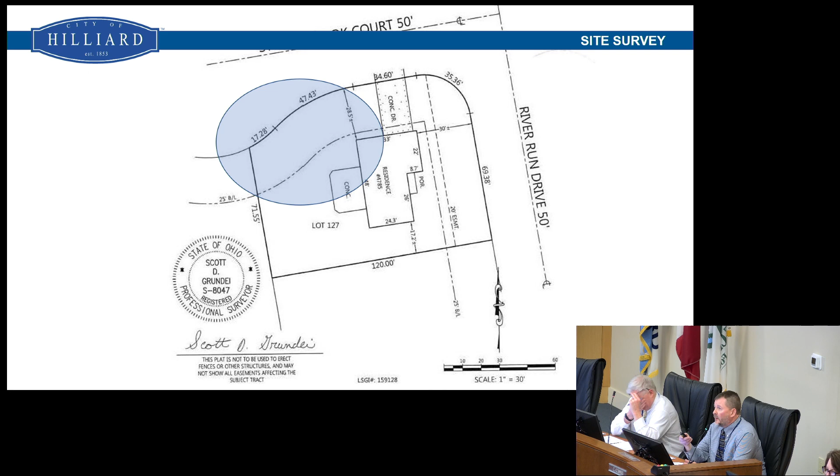The applicant, as noted in your packet, is looking at the portion in the blue bubble for the variances. There are some images submitted by the applicant, giving you a view toward the cul-de-sac in Stony Brook, so you can see the general area along the house and sidewalk where the fencing would be located.

This gives you a view of the neighboring property as well as the general area where the fence would make a turn and go down the side yard with the adjacent property. These are also images looking along the street and the corner of the house where the fence would extend out toward the sidewalk, and another view back toward the cul-de-sac bulb.

The applicant submitted 3 separate options. The first, option A, would basically place the fence 6 feet from the sidewalk. The right-of-way in this case is actually the center of the sidewalk, so the setback would be 8 feet. We've added a graphic to the bottom of the screen to generally show the approximate location of where that fencing would be placed based on the option.

Our major concern with the submitted options is ensuring the proposed fencing does not screen off or provide a visible barrier to the adjacent property. The second option, option B, has a variable setback but generally places the fencing outside of the landscaping, and we have a graphic showing approximately where that would be. The third option, option C, is another variation that would pull the fencing back behind some of the front landscaping, the small arborvitae, as shown in the picture.

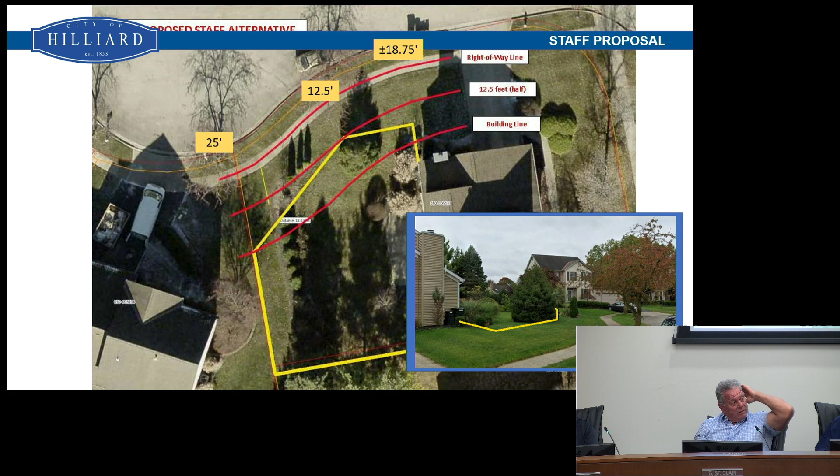In your opinion—go back to option C, if you could. That's the 15, so that's 12.9 to 15.3. Yeah, 15.3, 12.9. That one, I have no problem with.

I would think that from the cul-de-sac view, being able to see the evergreen and allowing it to grow on the outside of the fence would be a better solution, because you're really encumbering that evergreen on two sides. If you brought the fence in and allowed the evergreen to grow on the outside, one, it's going to conceal a heck of a lot of the fence, and two, as the evergreen grows, it's not going to create a problem with the fence.

Do you think it would look better from the cul-de-sac to have the evergreen on the outside, or would you rather see it on the inside? Help me understand your perspective. I think you'd run into the same problem with the fence on the inside—you'd just have the evergreen growing into the side of your fence that way. I think the amount of impact between the fence and the evergreen is limited if we bring it back.

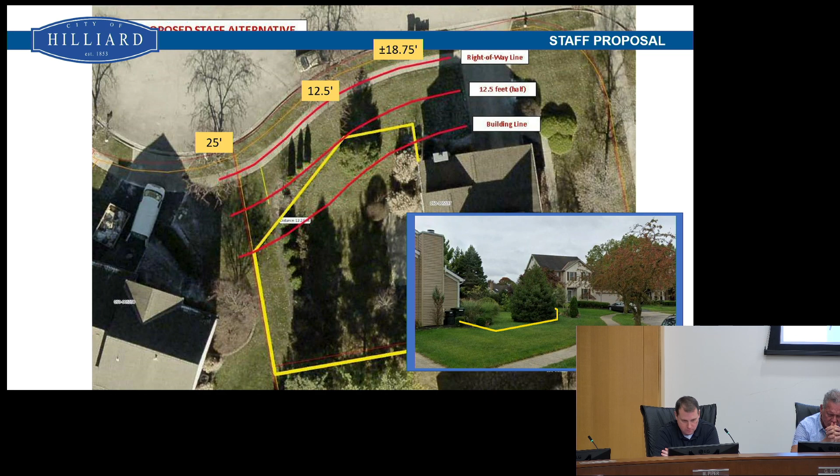Where we're kind of hitting it on two sides - if the fence is on the outside, we're really only hitting about a quarter of the circumference of the tree if it's brought in. In my opinion, I think his main concern is the amount of space you lose if you bring that fence inside that evergreen. You can see the red line going through the edge of the evergreen already, so we'd have to put it even further inside the building line, which would cut out a third of the front yard.

Are you putting a gate up there at the top of the driveway? Is that where the gate's going to go? When I talked with the fence company, the intent was to put one on that vertical yellow line, and then also another one in the backyard.

Somebody asked if we'd be comfortable having the fence at this point. It wasn't about comfort, it was visibility concerns. So this point is actually inside this neighbor's wall extended, so having it here, you're outside of that. That's one of the things you look at for corner lots generally, and why that original code section was included. But I don't remember any other lot with this similar situation - we've had ones that curve or angle a little bit, but not with a cul-de-sac bulb that close to the front property line. That's the one thing we were looking at, the view out of that window on that side.

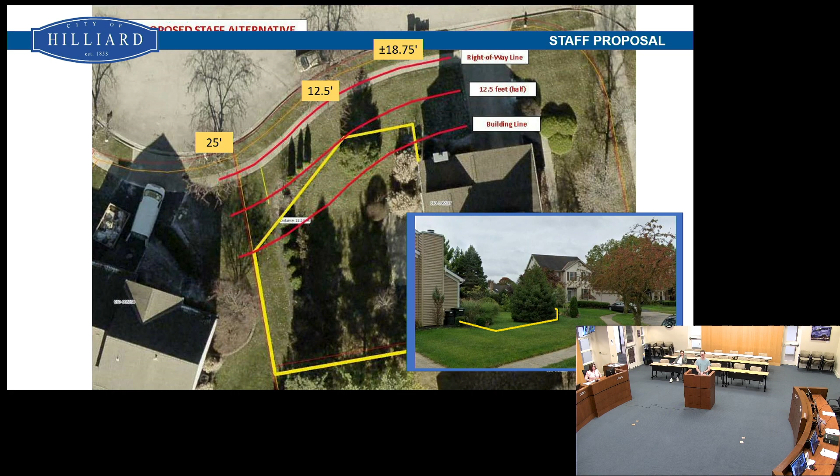But then we determined that the right-of-way was actually the center of the sidewalk, so that's not relevant to the discussion at that point. This is why we decided to do landscaping 5 years ago. Yeah, this seemed like a very unique, complicated situation.

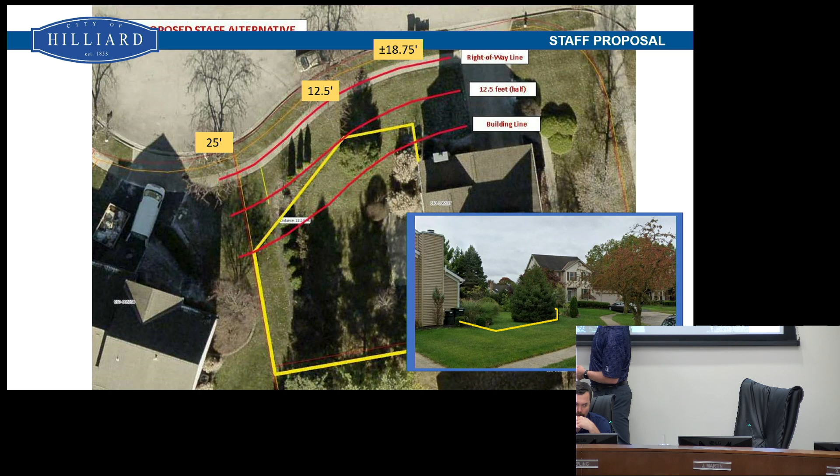Oh, is the landscaping inside the fence or outside the fence? No, I'm talking about this landscaping right there. It's outside. But if we take this line up to here, it's not. Yeah, it is. The river birch and those arborvitaes will be outside of it.

Okay. Thank you very much.

That would be helpful to include in a motion, the location with respect to those known points, because the aerial photo and a survey aren't always exact, so those lines are estimates based on that aerial. So it would be helpful to describe the placement in a motion, or in conditions, either way.

Okay, I'll make a motion. And if anybody wants to modify this, please say so before it is seconded. I move to approve, wait, I'm on the wrong one.

I move to approve a variance from Hilliard Code Section 1121.02D1I to reduce the setback along a secondary front line from 12.5 to 5 feet, to increase the permitted fence height from 48 inches to 60 inches, and to permit a wooden board-on-board fence in lieu of an aluminum wrought iron design. And actually, that 5 feet, from 12.5 to 5 feet, was a mistake.

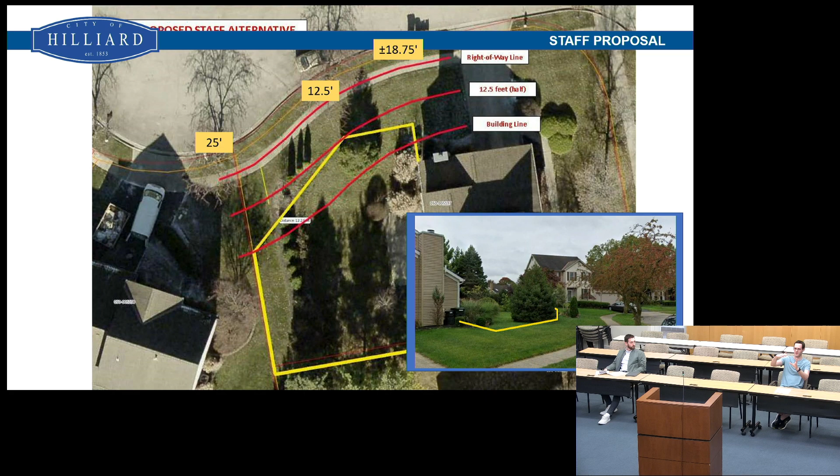I think it's clear from the image of the staff proposal that those are outside of the line. Agreed. So I don't know that we need to stipulate that, and it could be a problem if we said those have to be outside, and what if they die? Then does he have to plant more, or, you know?

Okay. Any other critiques? No. Okay. Is there a second? I second that motion.

President Epling, yes. Vice President Donato, yes. Mr. Piper, yes. Mr. Martin, no. Mr. St. Clair, no. Mr. Steele, yes. Mr. Steep, yes. Motion carries, 5-2.

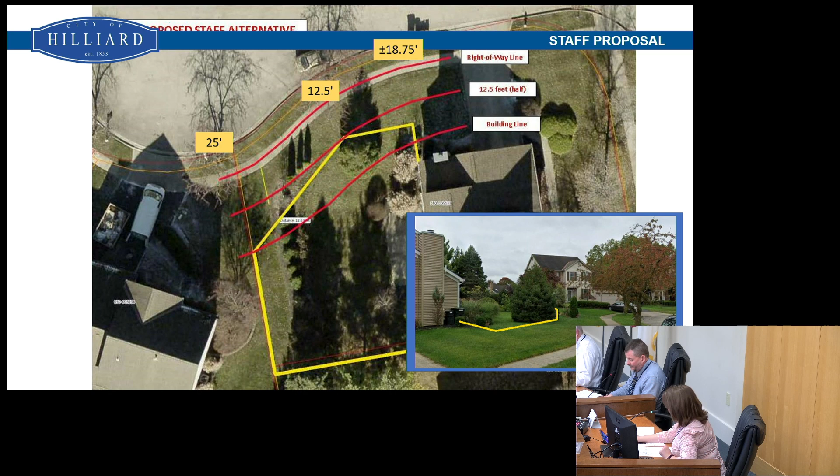All right, so do you understand which one we just passed here, and what your options are with that? Okay, all right, the staff plan, right?

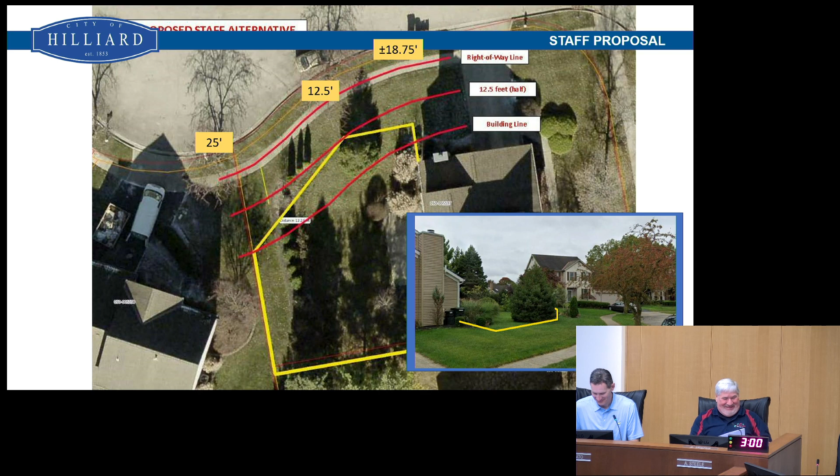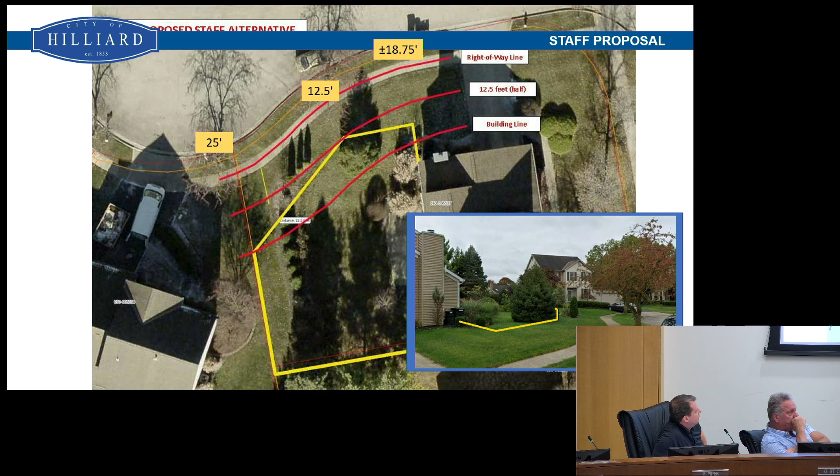So we passed the yellow line, but you have the option to move that yellow line up to, anywhere really, but with the thought of moving that up to the edge of your mulch bed there, instead of having it back against your property line. So you can have it inside, but you can also have it go all the way to the edge of your property. Who's going to explain this to the fencing contractor?

All they have to see is that picture, right? What's the permit going to say? Well, what we're gonna do is we're gonna get this on a survey.

And we will work with the applicant on getting that transposed onto a survey so that the fence contractor has a better idea of that. We can work with them on getting measurements, so this point, right, the build line.

Somewhere along here, he can be at the build line and then angle from here, basically around this evergreen, right? So what we can do is find these two approximate points inside these trees, outside this tree, and from this point to this number. But we will show that on the survey with his fence permit. So we'll have to work with him on getting that drawn correctly.

Right, so it's going to be surveyed, but they have the option to move it. Yeah, this represents the farthest out from the house it can be, yep.

I just want to be clear, the reason I voted no is because I don't like the ambiguity of where that can be. I understand it's the property line, but, okay.

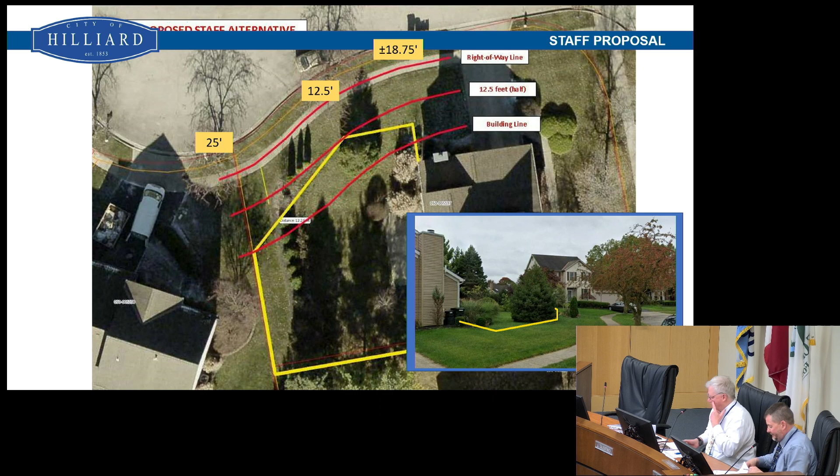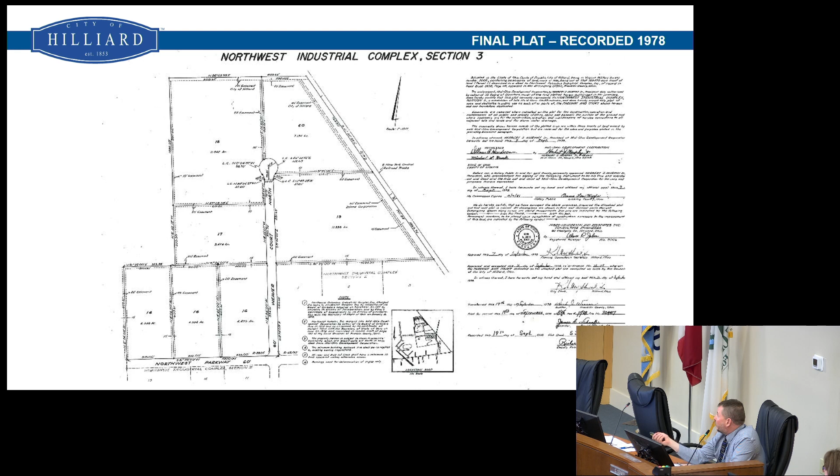Originally, this was platted in 1978. At some point these two lots were combined, and recently the Planning Commission approved a lot split to split those back out to the original parcels. So the applicant's looking to develop this residual piece, which is the original lot number 20 here at the top.

What's proposed with the M1 zoning is a series of buildings that'll have flex office type uses. As you'll note on the plan, there's existing retention and that will be expanded. This site actually does regional detention for this as well as the property to the south. And there are a number of very significant easements on this property.

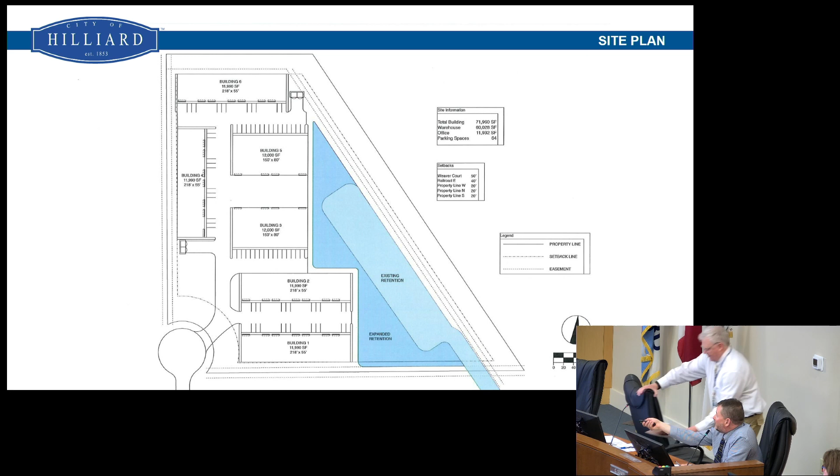So basically everything from the back side of the existing pond in this location, you can see all the dash lines, these are all easements which preclude the ability for them to plant trees. There are also easements down both of the side property lines, and there are actually multiple easements on the back of the property as well, adjacent to the residential development.

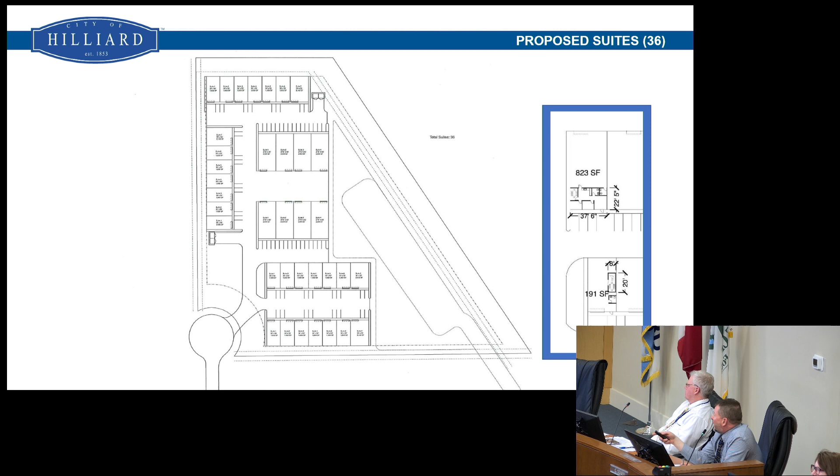What's proposed is to create buildings that'll have a number of suites. So this is something that the comprehensive plan supports, so that we can actually accommodate businesses as they're growing within the city. The Planning Commission recently, just last week, approved the site plan for this.

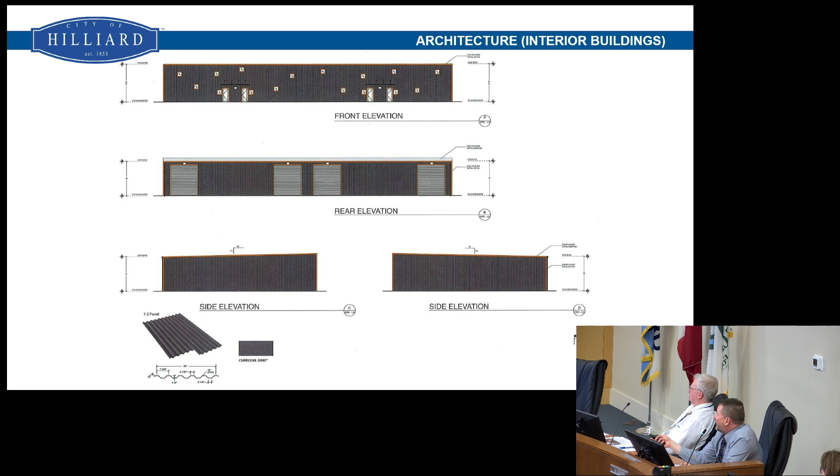So these are just some images of the architecture with what's being proposed and some prototypes for the materials that will be used, as well as for screening and dumpsters.

What's in your packet is a very detailed tree survey, so you can see they actually went out and mapped out every single tree on the site that was 6 inches or greater. You also received in your packet a full report that listed all of the conditions, the size, all of the details of each of the individual trees.

So in terms of the results of that, this particular site had 2,442 inches that are protected by the code. 99 of those will not be impacted by the construction. So in general, we're looking at 2,343 as the total to be removed. When you do the 50% reduction that's allowed by code, that gets us down to 1,172 inches.

And of note, while it's not identified or spelled out in the code, the applicant did note that there are 182 inches that are invasive or banned species, as well as 583 that are dead or dying or in poor condition. So if you take that into account, we're still looking at 406.5 inches. What's requested is a variance to reduce this to 150 inches, which would be the equivalent of 75 2-inch caliper trees.

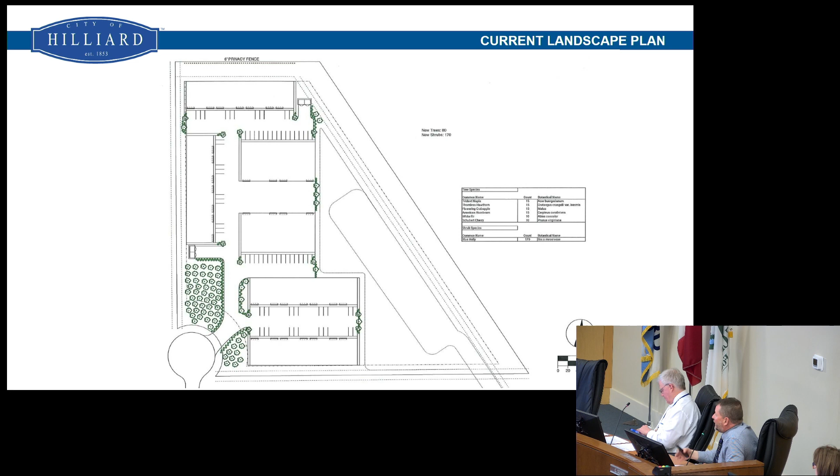And when you take into account that they're looking to provide some of those trees for public benefit, if they can't safely, for the health of the trees, put those on the site, we think that's a fair accommodation. So given all of those issues, the landscape plan will need to be revised when they come in for permits, but staff is comfortable that what they're asking for meets the spirit and the intent of the code.

This has significant limitations on the site that if you applied the code would make the site fairly undevelopable. So the replacement that they're requesting is one that's going to protect the health of the trees, and we would recommend approval with the six conditions.

Is the issue here that there are so many trees on this lot, and the code says that you can only remove half? So if there were fewer trees already, they could remove half of those and maybe even have more space.

Yeah, this is a case where we've had, I don't know, half a dozen or so over the years, where a site is so full of trees that it's not a reasonable way to develop it in full compliance with the code. The number of replacement trees would just be so high. In those cases, in each case, the board has approved a reduction.

What we try to do is get a reasonable number of trees on the site that won't compromise their long-term health, and then do those on site. If there's some additional that can be done off site, we work with them on it—we had the emerald ash borer affect some of the street trees, so in the past we've had some people replace some of those, or in a park where some things have come down. So we're willing to work with them on that.

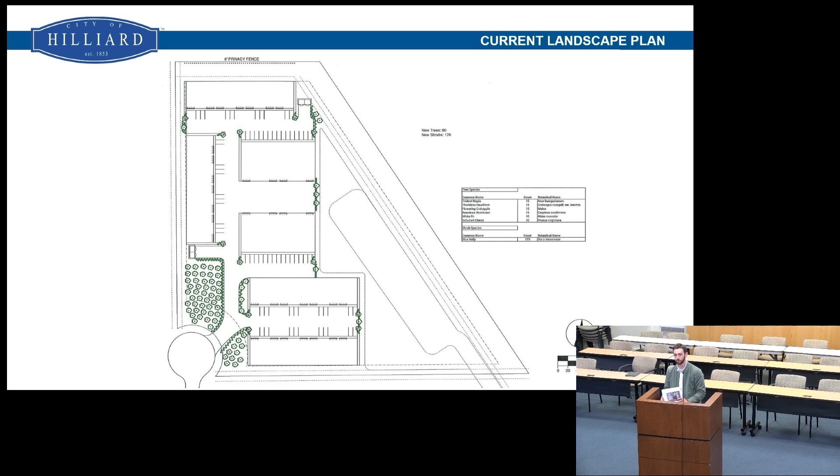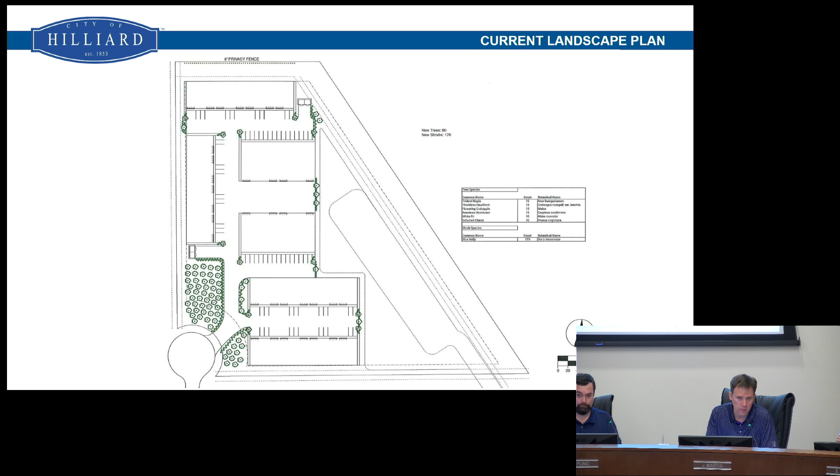So we don't have a drawing showing what trees we're going to keep. No. Can you describe what trees we're going to keep? Yeah, I can. It would actually be easiest to show you if I can. I can go for a walk.

But there you're planting some new, is that right? No, not - the challenge is there's easement on four of the five sides of the site. Okay, thank you, that was very helpful for me.